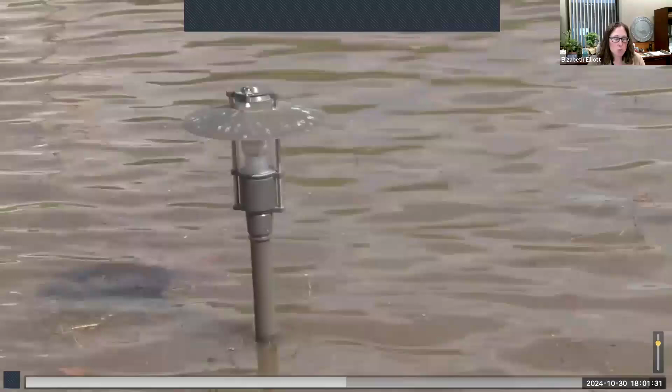Effective stormwater management not only prevents flooding, but it also reduces pollution in our waterways, and it ensures that our infrastructure can handle heavy rain events, and it was exciting to see rain today. But thanks to watershed strategic planning and our community's investment over the past 40 years, we have largely been spared from devastating floods that other communities across Nebraska and across the nation have seen.

As I mentioned, in May of 2025, we will commemorate the 10-year anniversary of the 2015 100-year flood event in Lincoln. This event really was a pivotal moment in our history, as the Salt Creek levee successfully held during that flooding, which prevented millions of dollars in potential damage. And as we saw in July this year, we are seeing heavier, more localized rain events that significantly impact our community.

Over the decades, our community has largely avoided any major flooding experiences, and the stormwater projects we undertake are guided by our master planning efforts and designed to strengthen Lincoln against such events. So our commitment is to continue our steady improvements across the community for stream stability and urban drainage, which are key to protecting our community, our residents, and our businesses from future flooding.

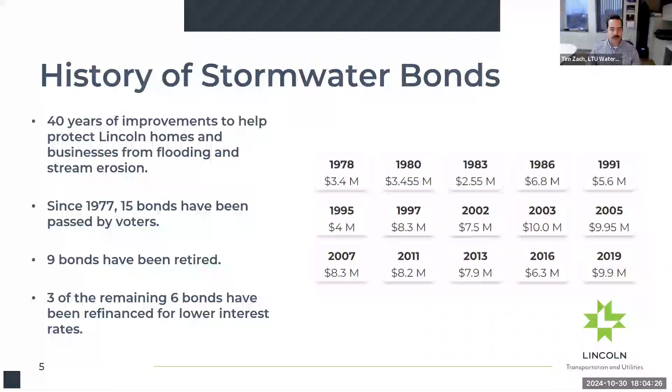For 40 years, our community has supported Lincoln Transportation and Utilities' strategic efforts through the approval of 15 stormwater bonds since 1977. These 15 bonds have all been passed by the voters. 9 of these bonds have been retired, and there are currently 6 bonds remaining. Of those 6, 3 have been refinanced to lower interest rates.

I wanted to give an example of recent stormwater projects and how public value is created from investing in these infrastructure improvements. Before the improvements near 56th Street and Fletcher Avenue, many businesses in the area reported flooding every few years. You can see in these pictures there's water in one of these offices and flooding getting outside of the channel onto Fletcher Street.

With funds from the 2016 Stormwater Bond, the city partnered with the Lower Platte South Natural Resources District and was awarded a FEMA grant to widen the channel, replace the bridge at Fletcher Avenue, and reduce the flooding in the area. Since this project was completed in 2021, the city has received no reports of flooding in this area.

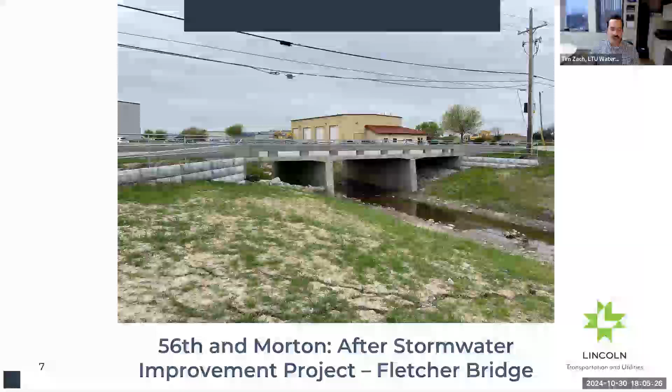Another example of a project that has protected infrastructure and property is the Beal Slough at 14th Street. This project was funded with the 2007 Stormwater Bond to again widen the channel, replace 2 bridges, and reduce flooding to the state penitentiary and businesses in this area.

This $13.9 million bond issue will use these funds for a range of stormwater management projects. These projects are designed to improve our infrastructure, reduce flooding, and protect our environment. They will focus on flood reduction, floodplain preservation, stream stabilization, urban drainage improvements, and water quality improvements.

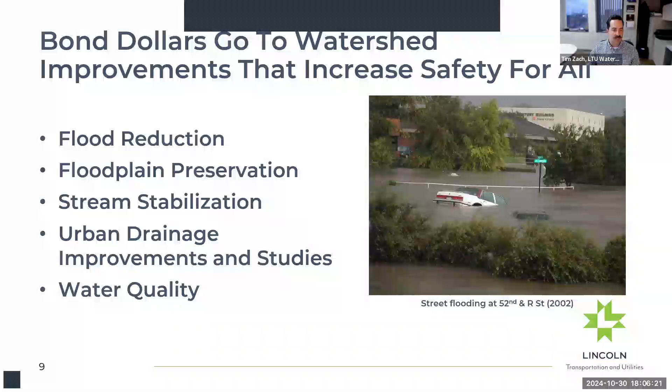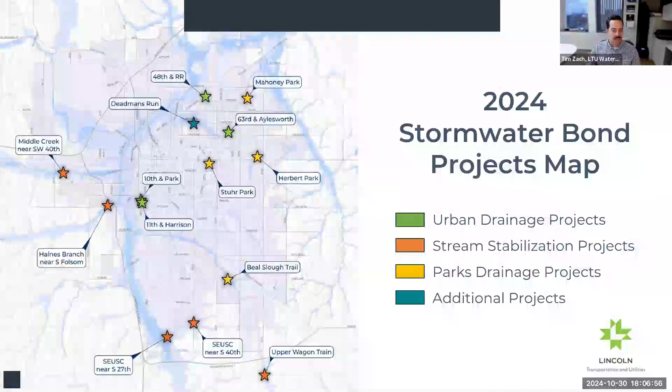So first, for the urban drainage projects, these projects reduce flooding in streets and neighborhoods. They address local flooding issues that we've identified in our studies. These projects involve improving the drainage system under the streets, such as constructing larger storm pipes and more inlets to reduce street and property flooding.

The projects that would be funded are the 48th Street at Cornhusker Highway Railroad undercrossing, the area around 10th Street and Park Avenue, and 11th Street and Harrison Avenue, and the area around 63rd Street and Aylesworth Avenue. And these 4 areas have been identified in our studies as areas of flooding potential and as priorities for us to address.

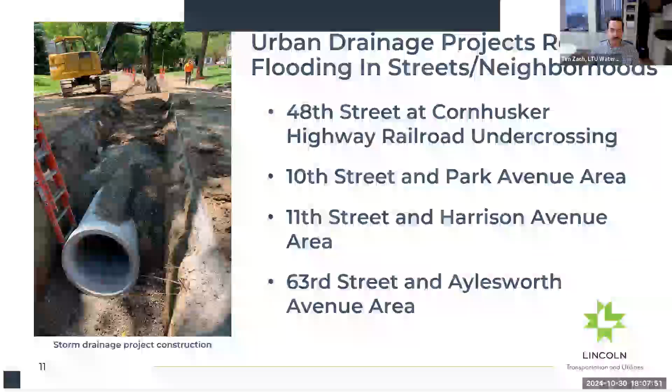The 48th Street at Cornhusker Highway Railroad undercrossing was one that experienced flooding in the heavy rains we received in July of this year. And we are planning improvements at this area to improve the pumping system, as there's a pump that pumps stormwater out of this undercrossing, and also look at improving the inlets and storm pipes to reduce the frequency of flooding and the severity of flooding here.

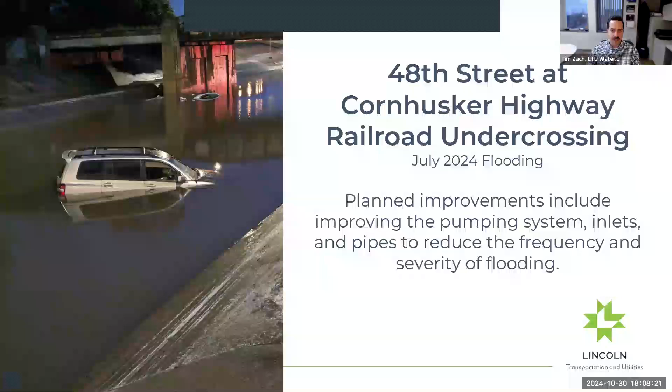The next projects that we have identified are stream stabilization projects. These projects stabilize the stream channels to improve water quality and prevent erosion and reduce flooding. The goals of these projects are to be proactive. We have done watershed master plans that identify these stream erosion issues and have prioritized these locations to stabilize the streams. This helps reduce development costs and protects city development and new neighborhoods from potential erosion.

So the projects that we've selected are along Haines Branch near South Folsom Street. This is right near the Van Dorn and Highway 77 interchange. The next one is Southeast Upper Salt Creek near 27th Street, in between Rokeby Road and Saltillo. And then another one on Southeast Upper Salt Creek near 40th Street, just north of Rokeby, where the city recently constructed a new bridge. And then along Middle Creek near Southwest 40th.

This is north of the West A area and east of Southwest 40th. And this will kind of help protect Middle Creek as well as the West A neighborhood. And then one along Upper Wagon Train near Bennett Road. This is just south of the new Standing Bear High School. These 5 areas are in new growth areas, and some of them are outside of city limits, but these help protect and stabilize streams ahead of development getting to these locations. We also have identified some other smaller miscellaneous projects that we'll be implementing.

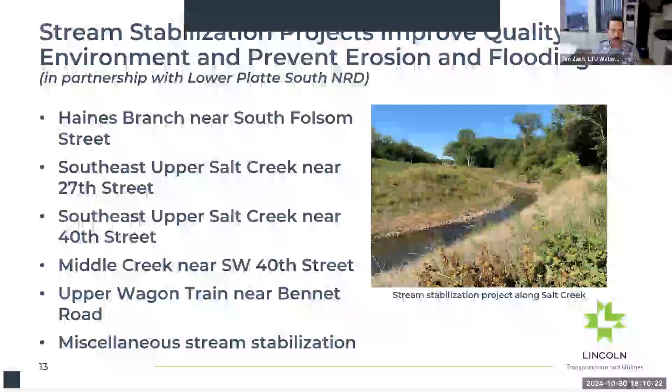The next one is Herbert Park channel stabilization. This is to stabilize the channel through Herbert Park. Stuhr Park channel stabilization. Stuhr Park has a concrete lined channel that has deteriorated, and so we'll look to repair that, partnering with parks as they look to improve the park infrastructure and playground equipment. And then Mahoney Park channel is another concrete lined channel that is starting to deteriorate that we'll be looking to address.

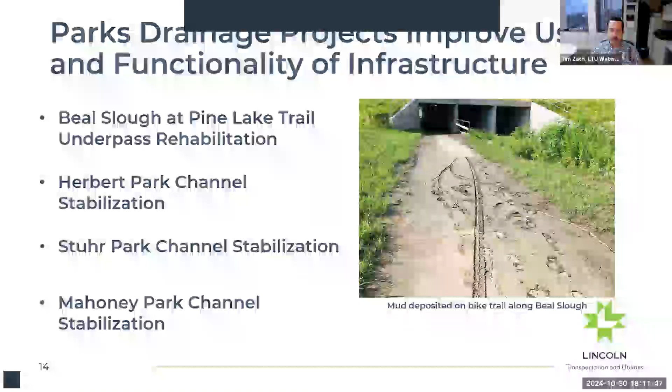Some additional projects that will also be funded by the Stormwater Bond are urban drainage studies. I mentioned that the urban drainage projects that we'll be doing came out of urban drainage studies. We have studied a lot of the areas of the city, especially in older neighborhoods that have undersized infrastructure that has deficiencies, but there are still areas that need to be studied. So we'll continue to study our existing system to look where there are deficiencies, where there are areas of flooding potential, and prioritize those areas and identify projects to address that.

We also have money set aside for street drainage. This is money to coordinate with street improvement projects, if there's drainage needs identified with those projects. The Stormwater Bond also has additional funding set aside for the Dead Man's Run flood reduction project, and I'll get into this in a little bit more detail on the next slide.

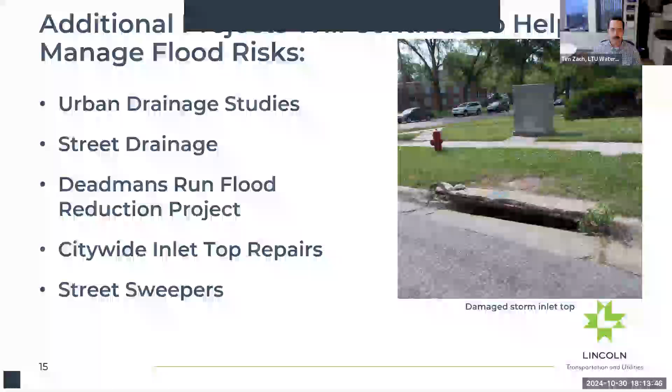So as I mentioned, we are looking to set aside additional funding for the Dead Man's Run flood reduction project. This project originally was started with the city and the NRD when we reached out to the U.S. Army Corps of Engineers. They came up with a plan for a project to remove the flooding from approximately 480 structures, so 480 homes and businesses. The original cost estimate was around $25 million, and the project was anticipated to be completed in 2022.

Well, that project saw many delays with the U.S. Army Corps of Engineers, and the costs continued to escalate to a point where the city could not afford to do the project, and we weren't receiving the same benefits that we were initially anticipating. And so the city and the NRD have decided to look to complete this project on our own without the Corps of Engineers. We have been looking at some other options that will still achieve the same benefits of removing that flood risk from approximately 480 structures, with a cost of about 26 million. So to get this project completed and across the finish line, we need to set aside some additional funding to complete this project with this stormwater bond.

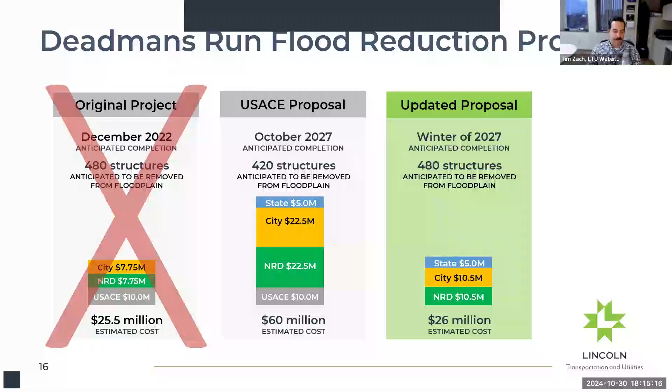So the breakdown of the funding for the different types of projects is $3.6 million for flood reduction and floodplain preservation projects, $3.6 million for stream stabilization projects, $5.7 million for urban drainage improvements, $1 million for street sweepers to improve water quality, for the total of $13.9 million. This is expected to cost the average household about $9.65 per year. And that's roughly 80 cents per month.

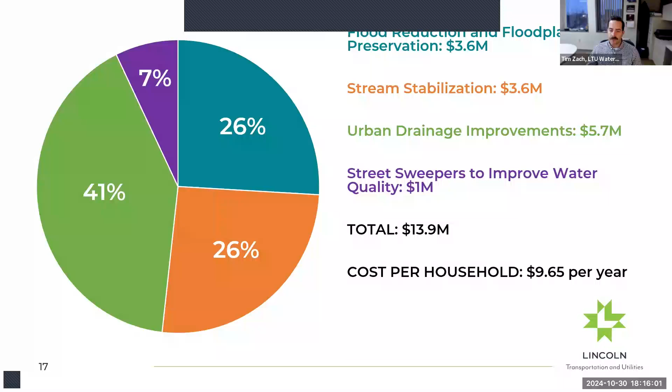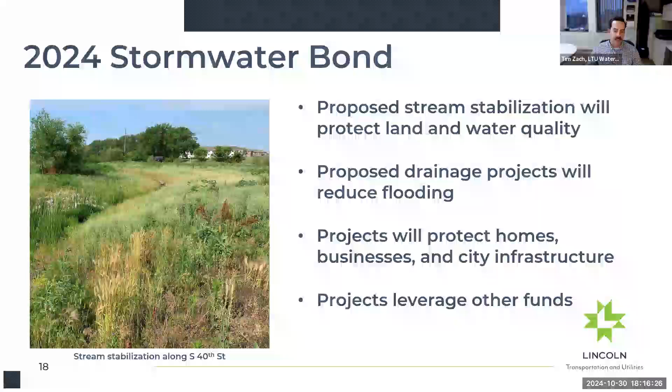So to conclude, the proposed stream stabilization projects will protect land and water quality. The proposed urban drainage projects will reduce flooding. These projects protect homes, businesses, and city infrastructure, and these projects leverage other funds. As I mentioned, there is no other source of funding for these projects. The bond dollars are the only funding that the city has for stormwater projects. And without bond dollars, the city would not be able to receive funding from other state and federal agencies. And we would not be able to partner with other local agencies such as the Lower Platte South Natural Resources District. So with that, I will turn it over to Liz.

All right. Thank you, Tim. I know that was a lot of information, and what we really wanted to do was get to questions and anything that all of the viewers out there are interested in. So we can turn now and open it up for questions. You can go ahead and write the questions in the chat, and Erica will help us make sure we hit all of the questions. No questions so far? I'm not getting any questions. A few minutes. It's a lot of information to digest, and we gave you a lot of information.

Okay, there is one question. Are any of the homes to be removed as part of the Dead Man's Run project inhabited? Well, with the project, we will not be physically removing any homes or businesses, but we will be constructing some detention basins to hold back floodwaters, as well as widening out the channel so that the floodwaters stay within the channel, and replacing a couple of the bridges so that the floodwaters can go under the bridge instead of spilling over into the neighborhoods. So the idea is we'll be removing the floodplain from those homes and businesses so that the flooding stays within the Dead Man's Run channel.